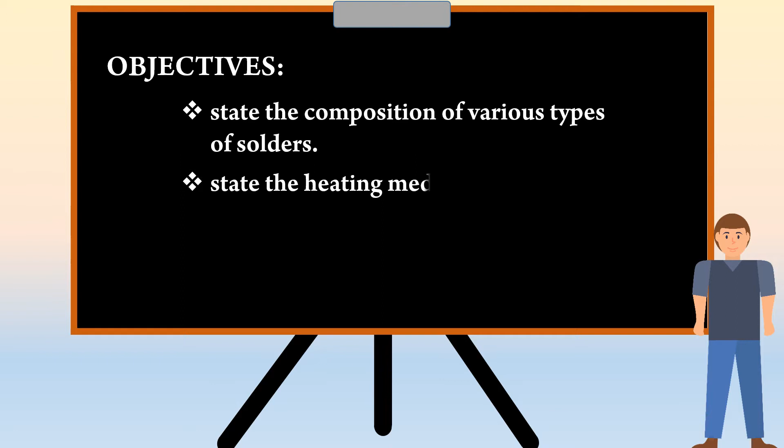State the method of soldering. State soldering joint.

First, we are going to see the definition of soft soldering. The process of joining metals using tin lead solders, which melt below 420 degrees Celsius, is known as soft soldering.

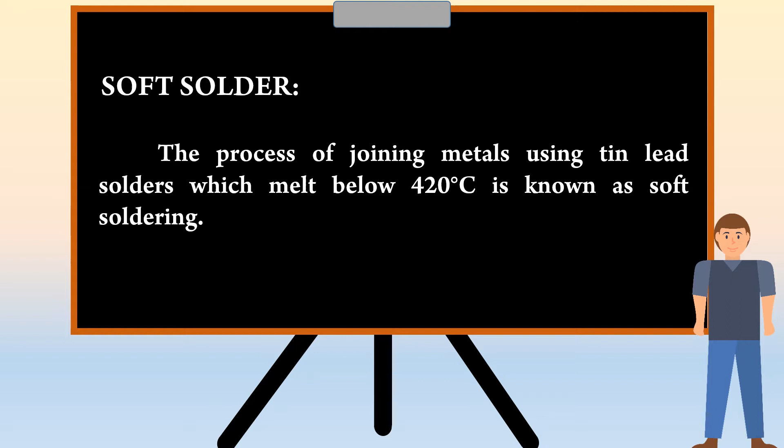Now, we can see the process of soft soldering one by one. First, preparing the workpiece. Second, select the correct soft solder.

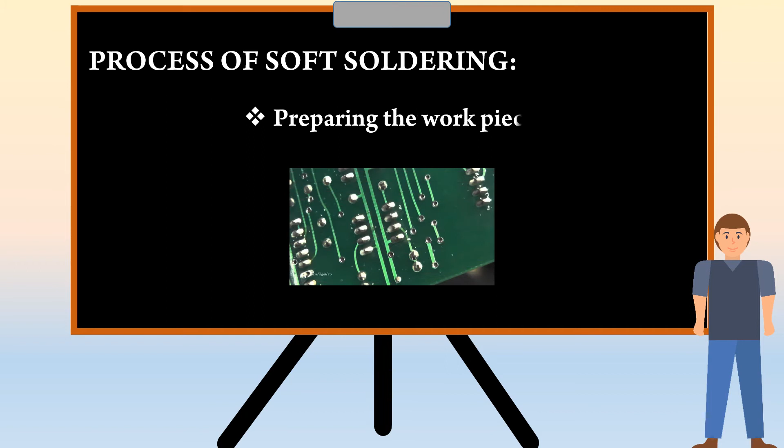Third, preparing the soldering iron.

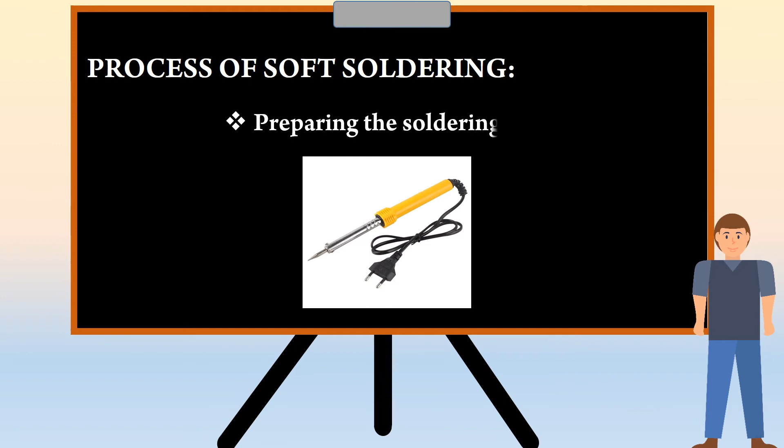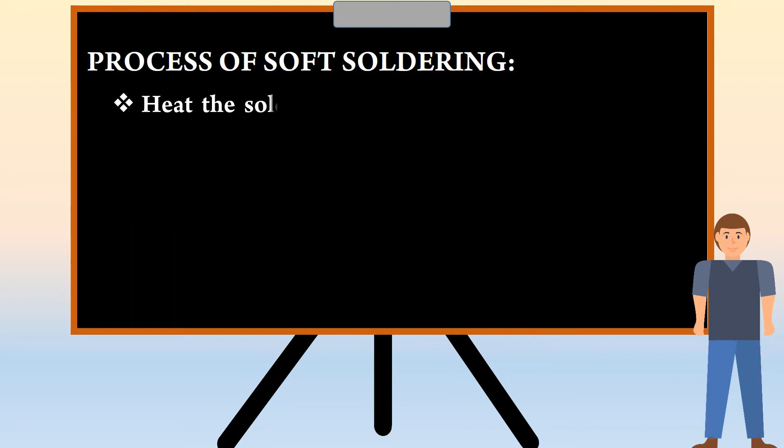Fourth, select and apply suitable flux. Fifth, heat the soldering iron bit and the workpiece to the correct temperature.

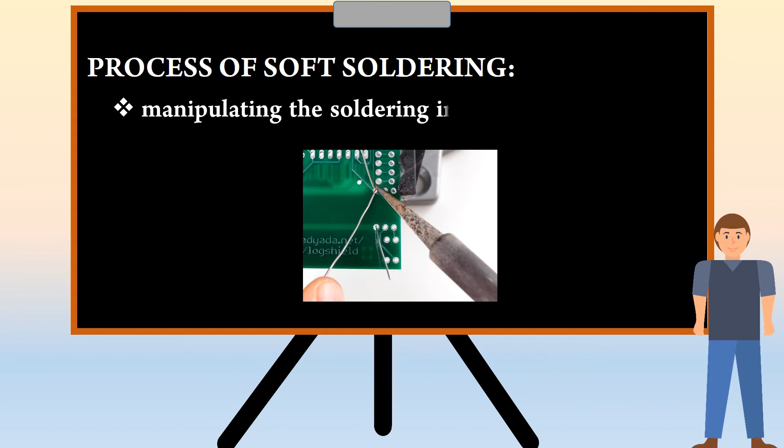Sixth, manipulating the soldering iron on the workpiece skillfully. And finally, complete the job to a satisfactory standard.

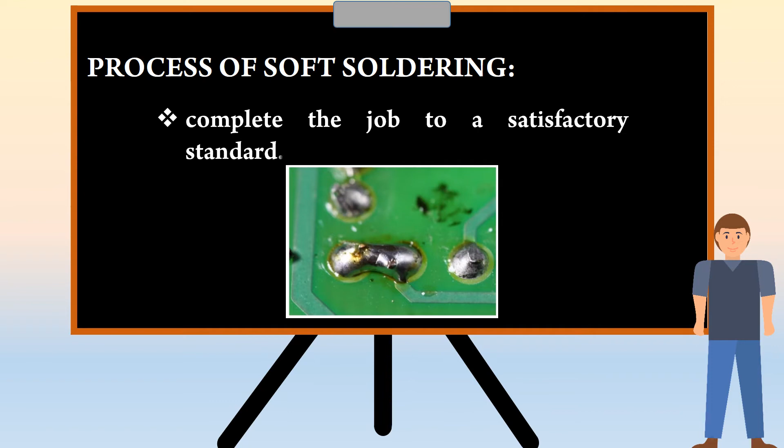And now, we are going to see the melting characteristics of soft solders.

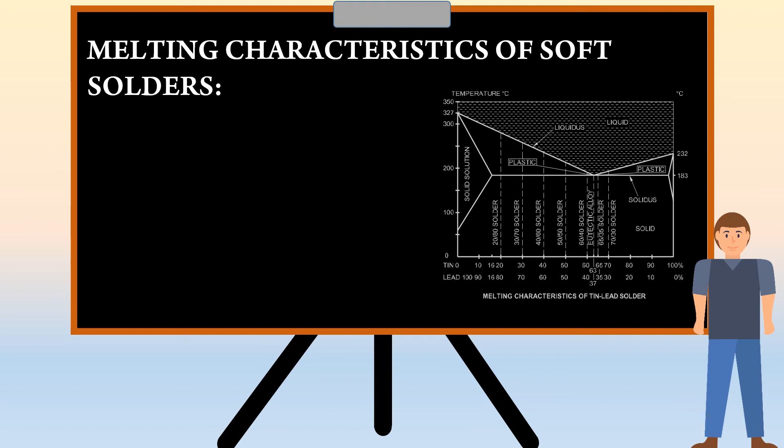The eutectic alloy of tin lead solder is a mixture of 63% tin and 37% lead. 63/37 solder melts at 183 degrees Celsius and is the lowest melting point of all combinations in the alloy series.

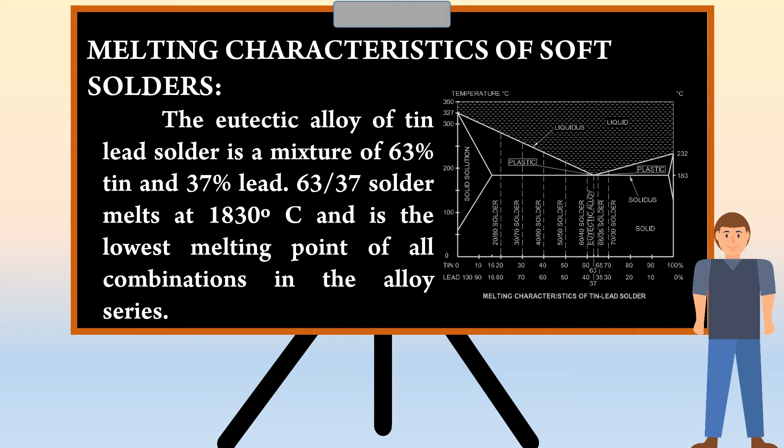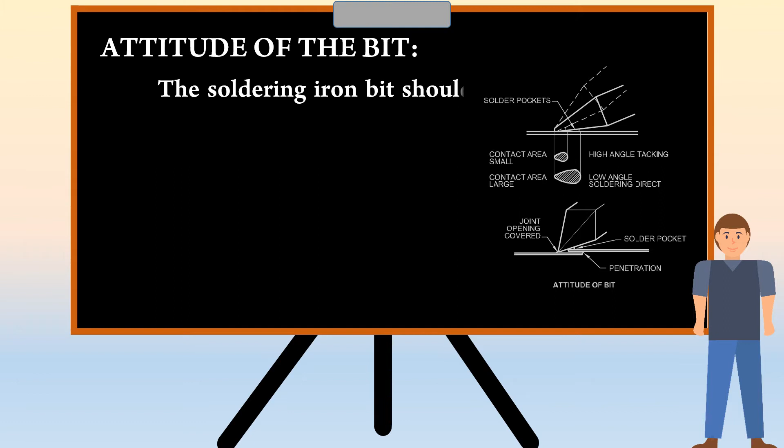Next, we can see the attitude of the solder bit. The soldering iron bit should be placed in a position that enables sufficient heat and solder to flow into the joint. The angle between a working face of the bit and the joint surface should be filled with a pocket of solder.

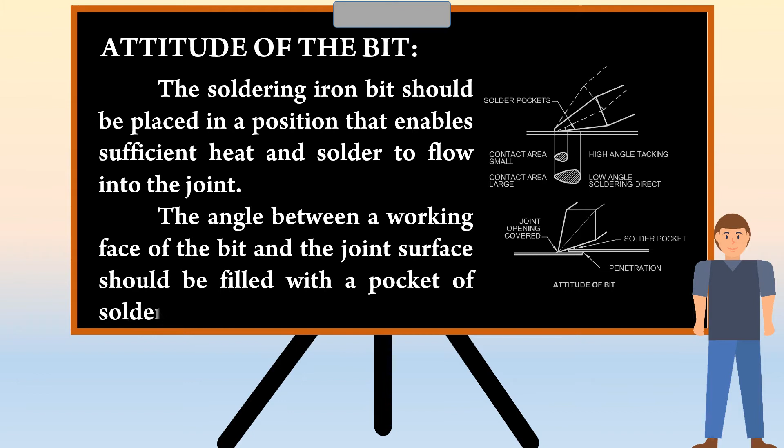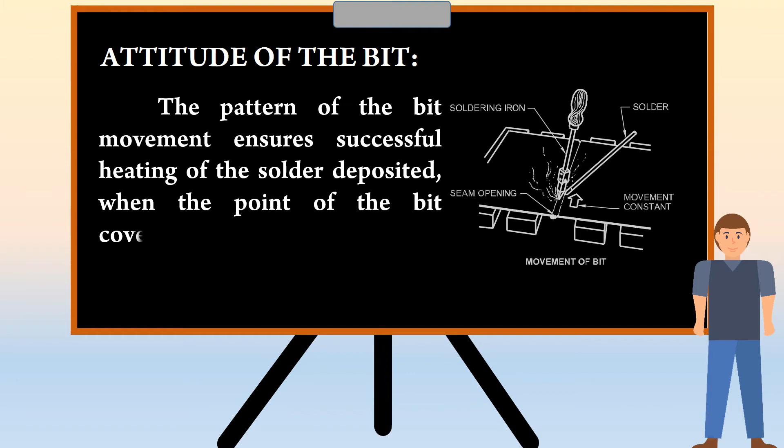The pattern of the bit movement ensures successful heating of the solder deposited, when the point of the bit covering the joint opening penetrates through the lap.

Let's see the definition of the next heading. Hard solder: the process of joining metals using hard solders, consisting of copper, zinc, cadmium, and silver, which melt above 600 degrees Celsius, is known as hard soldering.

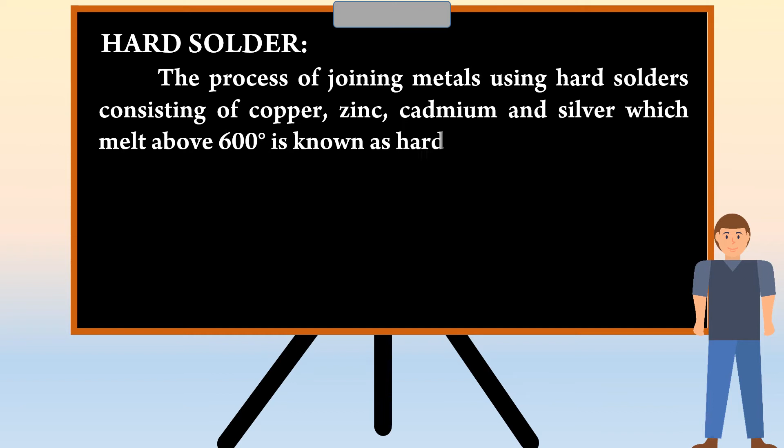Brazing is a hard soldering process used to join copper, brass, and most ferrous metals. Silver brazing, or silver soldering, is a process used to join steel, copper, bronze, brass, and precious metals like gold and silver.

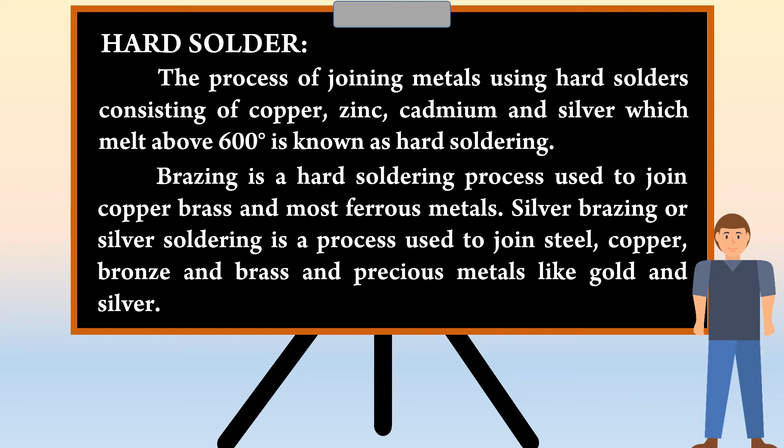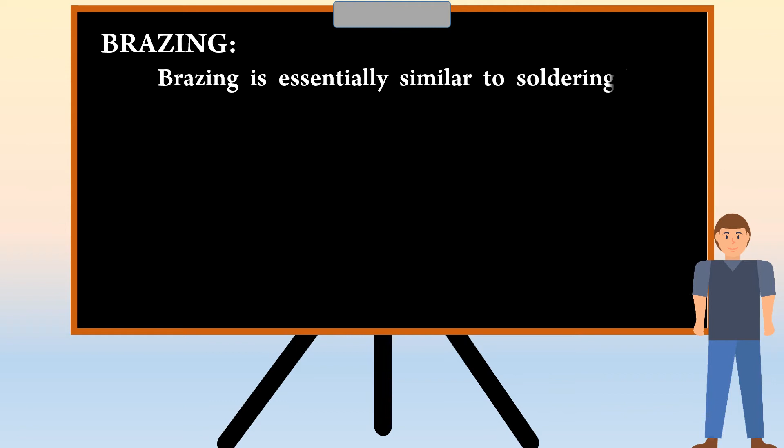Next, we are going to discuss brazing. Brazing is essentially similar to soldering, but it gives a much stronger joint than soldering.

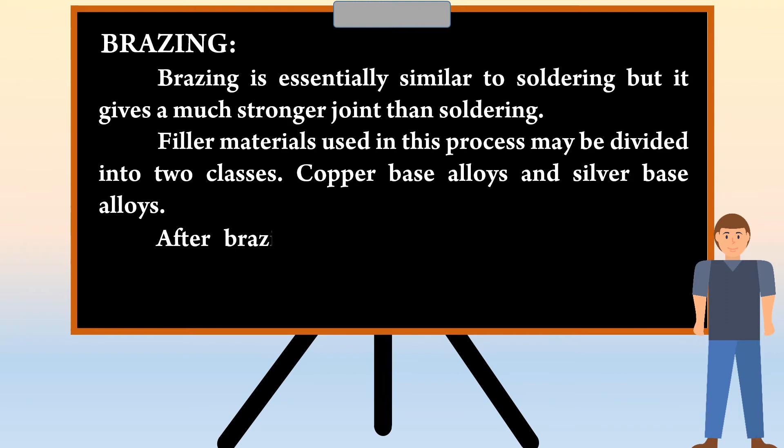Filler materials used in this process may be divided into two classes: copper base alloys and silver base alloys. After brazing, the joint must be hammered to check for leakages and to remove flux.

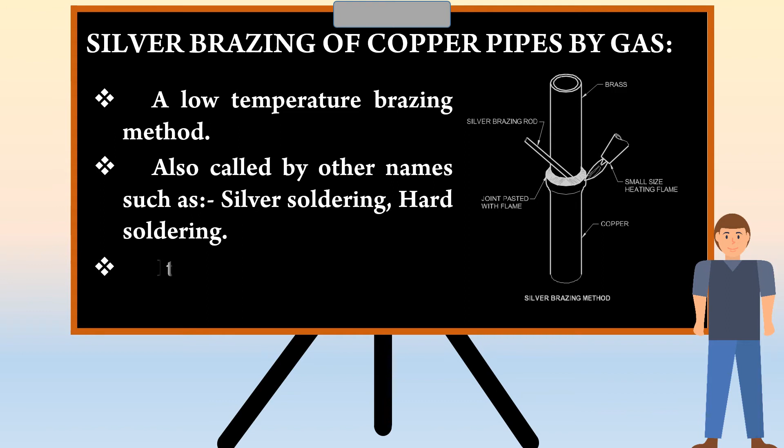Now, we can see the silver brazing of copper pipes by gas, a low temperature brazing method, also called by other names such as silver soldering or hard soldering. Its temperature range is 600 degrees Celsius to 850 degrees Celsius.

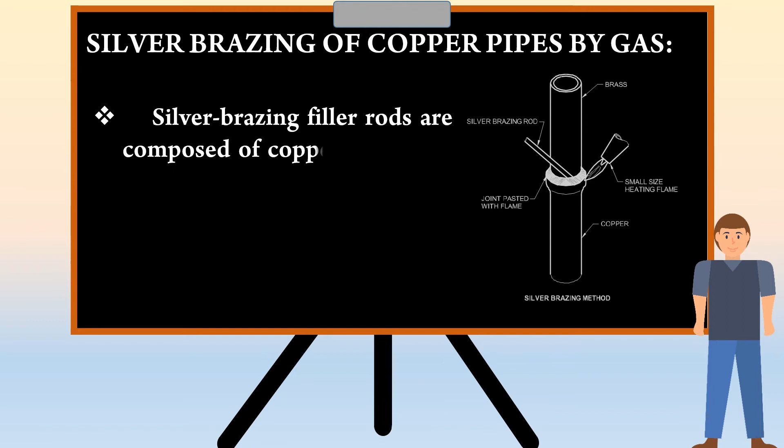Silver brazing filler rods are composed of copper and silver, with a small percentage of zinc, cadmium, and nickel. Silver content may vary from 40 to 60%.

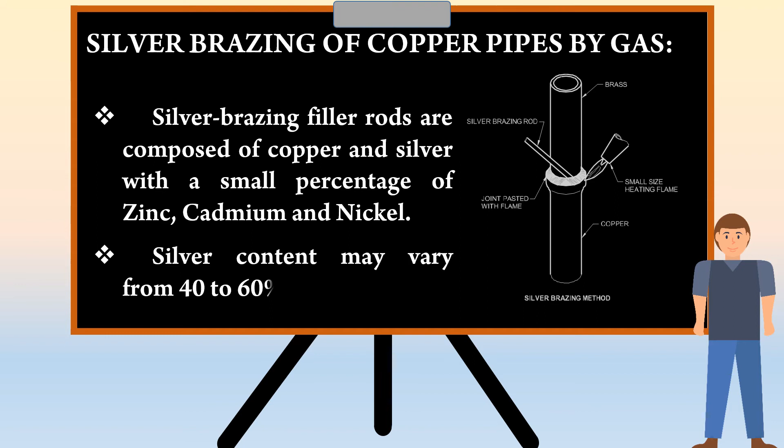We are going to see the next heading: applications of silver brazing. Joining electrical parts requiring high electrical conductivity.

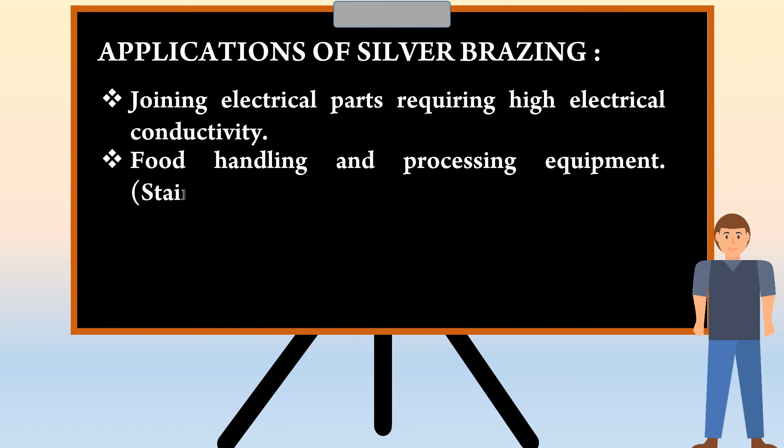Food handling and processing equipment, stainless steel. Economy in brazing operation requiring a low temperature, thin layer, and quick and complete penetration.

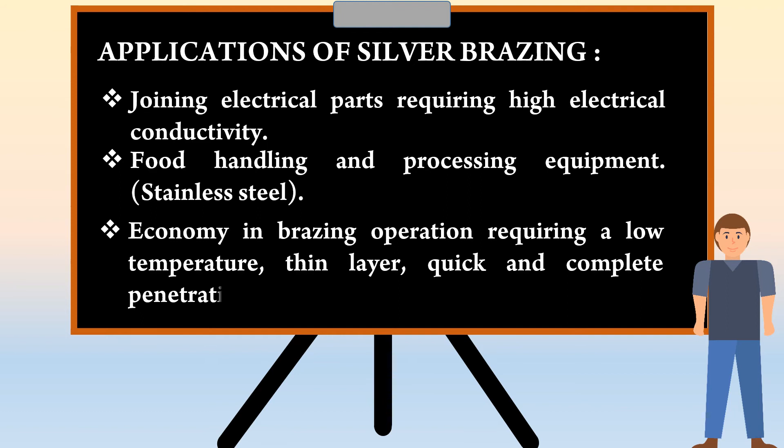Now, we can see the methods of soldering. The first method is soldering irons. Second is torch soldering. Third is dip soldering. Fourth is wave and cascade soldering.

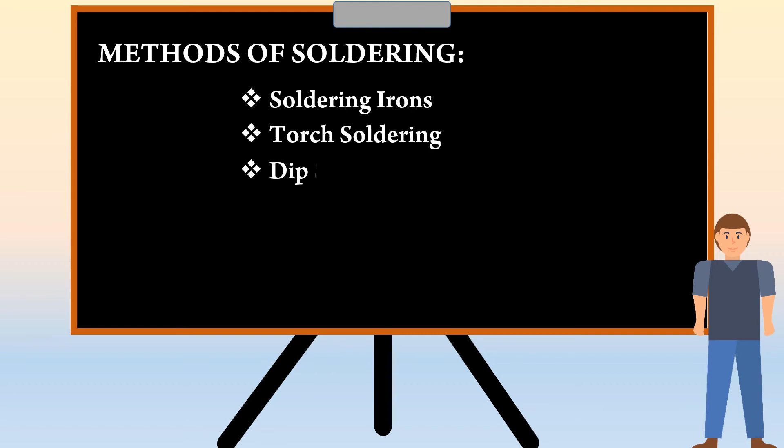Fifth is oven soldering. And the last method is resistance soldering.

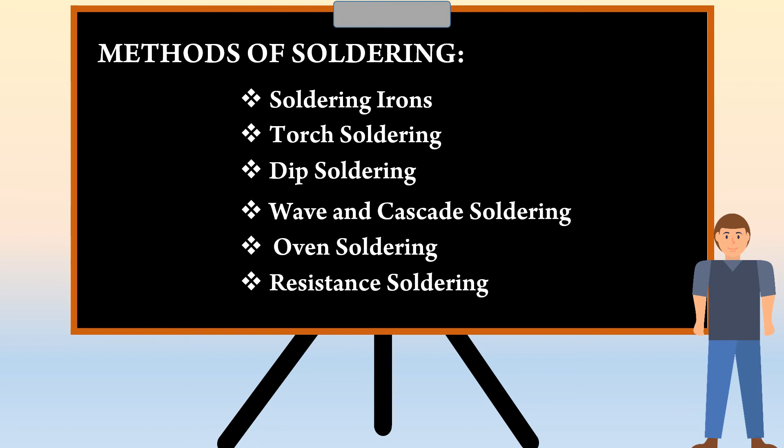After the methods of soldering, we are going to discuss soldering joints. Sheet metal components are joined together by soldered joints.

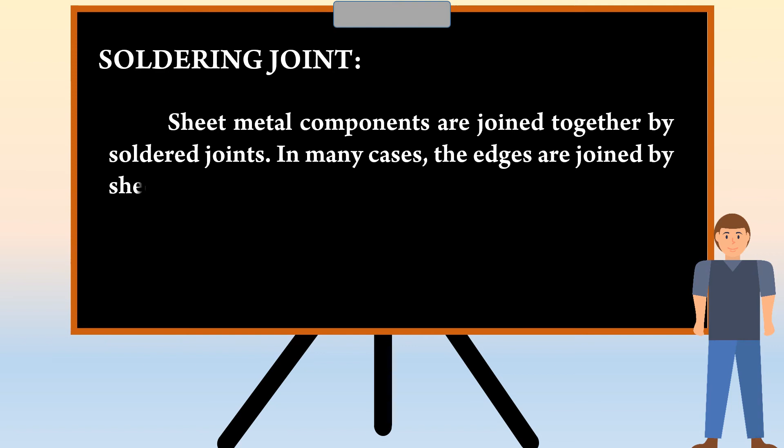In many cases, the edges are joined by sheet metal mechanical joints, and then soldered to make the joint stronger and leak-proof.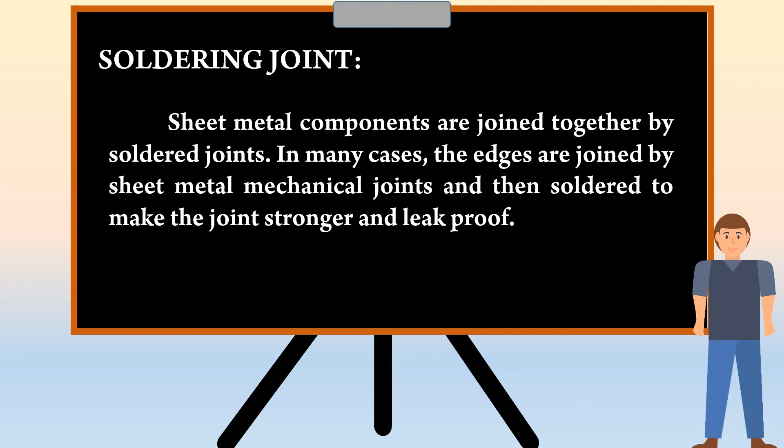Next, we are going to see how to select the soldering joint. First, a suitable filler alloy must be used. Second, joint clearances should be minimum.

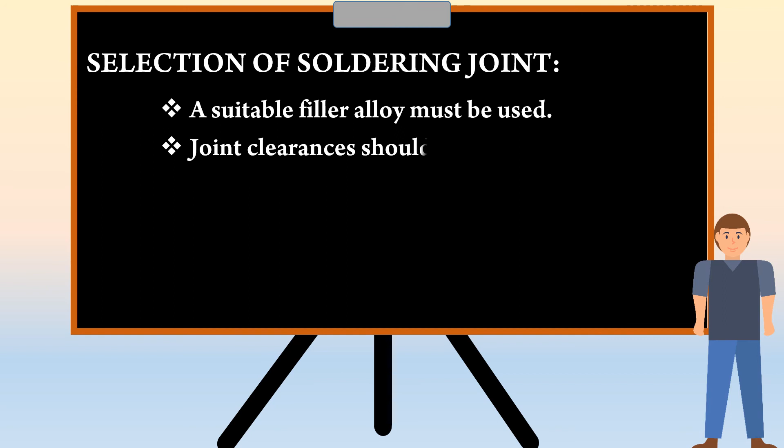Third, the solder must contact the lapped surface sufficiently. And last, workpieces must be firmly supported.

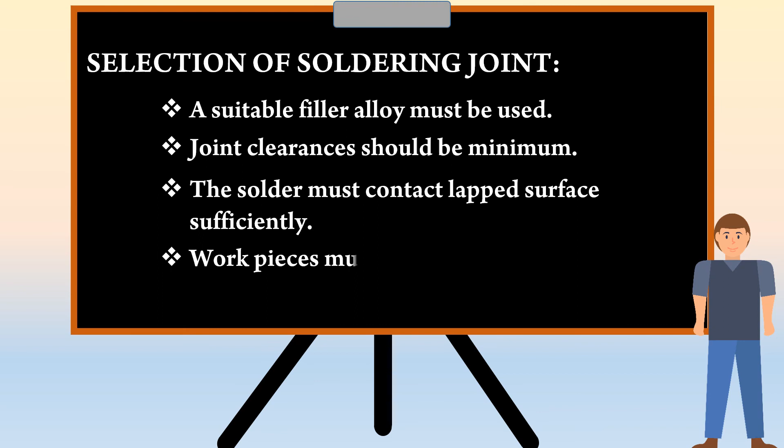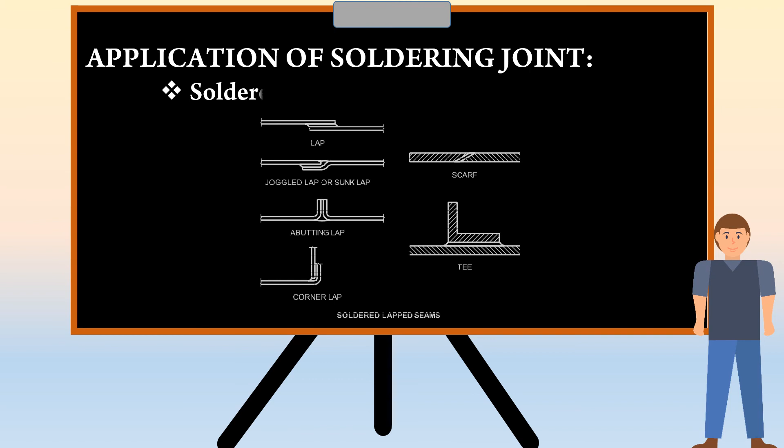And the last heading is application of soldering joint. The first one is soldered lap joints. Second one is soldered seams.

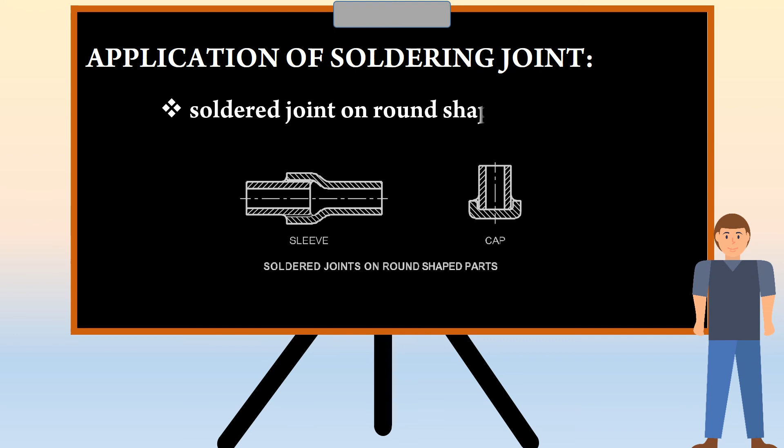Third one is soldered joint on round-shaped parts. And the fourth one is sheet metal joints, both lapped and folded, which are suitable for silver soldering.

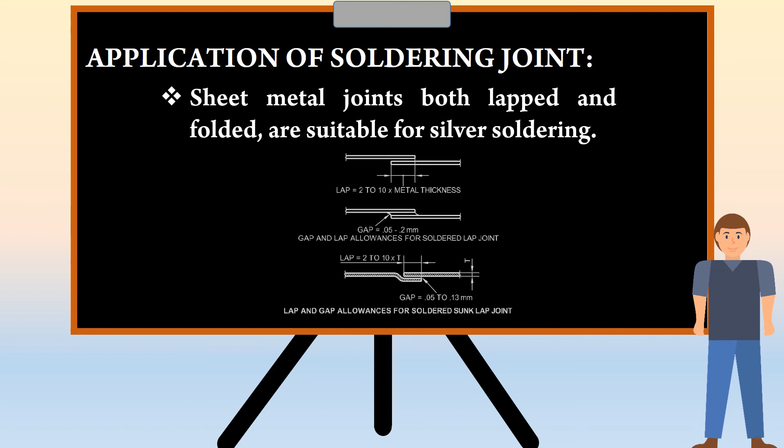With the remembrance of this topic, we are going to play a quiz game. The question is, what is the melting point of 63/37 solder? The options are A.

100 degrees Celsius, B. 450 degrees Celsius, C. 0 degrees Celsius, D.

And the answer is D. 183 degrees Celsius.

With this, we have completed the topic of soft solder and hard solder. We have completed all the topics of week number 17.